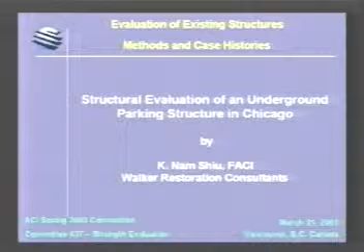Let me outline what I'm going to talk about. First, I'm going to describe what the structure is and give you some specific background on what we're talking about. Afterwards, I'm going to separate into two main portions.

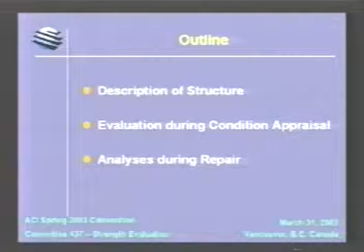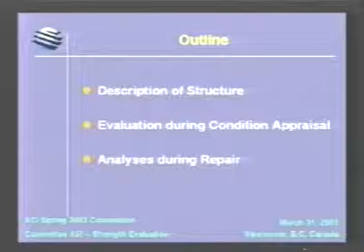One is the evaluation during condition appraisal before we actually recommend and do repair, including some structural analysis and the thinking behind it and what we did to evaluate and come to the conclusion on how we recommend repair. The other portion is during the repair, there are other issues we have to resolve, and what type of analysis we did to resolve the issues during the repair portion.

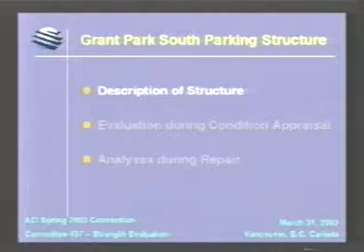The garage I'm going to talk about is Grant Park South parking structure, located right in the downtown area of Chicago. And this is a map.

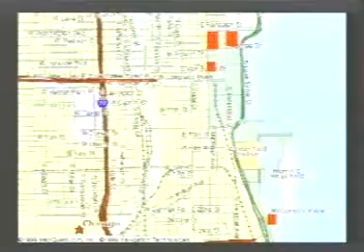And what you will see, if I can, this is an actual typical downtown area. The parking structure we're talking about is right over here. You can see all this green area is the park district. This is underground, so you won't see it from the top. It's all underground. These major parking structures serve a lot of the downtown commercial areas, so it's a fairly busy area for parking.

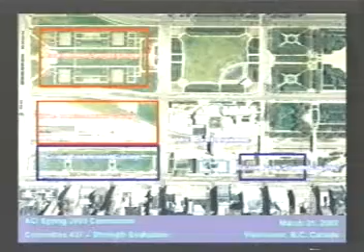And this is the overhead view. What we are talking about is this portion. As you can see, there's quite a bit of greenery, and Chicago's mayor is a green mayor, so to speak, so they want to keep it fairly environmentally friendly.

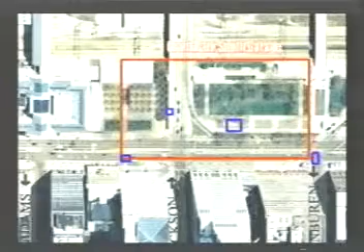It consists of two support levels. As you can see from the aerial view, the entrance comes from the street level and then goes into the first support level, second support level, and then there's an on-grade support. The total repair cost is about $30 million.

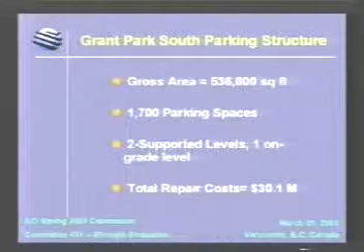Now, this was built way back then. We dug into the archives to find a lot of the basic actual construction documents to find out when they built it, because this is recessed and very close to the lake, as you can remember from the previous slides. There was major concern about hydrostatic pressure pushing on this structure, so actually the floor slab on grade resists a uniform distributed hydrostatic load, which makes for a very different design than what we would normally have for a slab on grade system.

Let's go into what we did during the evaluations. As many people talk about, the processes are similar: initial investigations and then detailed ones.

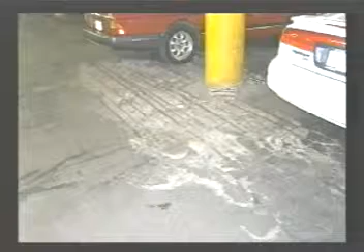When you walk into this garage before it was repaired, something that really catches your eye is you can see areas around the column like this where the rebars are exposed. You can see it humped up because it was pushing out due to corrosion, and this is not an isolated area.

You can look around the drive aisles, and some of the patches are already gone. You can actually see exposed bars. This is a reinforced concrete structure, not a post-tensioned one. You can also see some of the yellow lines, which we marked by sounding to find out where the delaminations are.

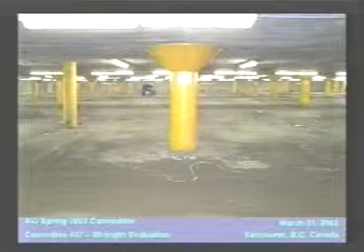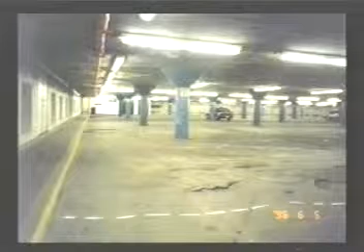We did fairly detailed mapping of the situation. As you can see, there's a lot of spalling and delamination around the column heads. Again, similar pictures show what it looks like, fairly deteriorated.

We also did material testing to find out the condition and level of chloride. This is inside, and we found out that the chloride level is fairly high.

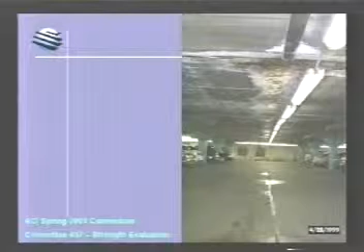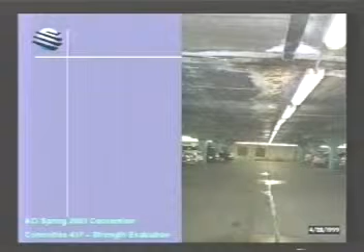Now, we also looked at the underside of the slab. In particular, you can see two things in this slide: water dripping down, and a wet spot on the lower level. When you look straight up, there's quite a bit of corrosion. That indicates that salt has been coming through the construction joint, causing the lower level of steel to corrode.

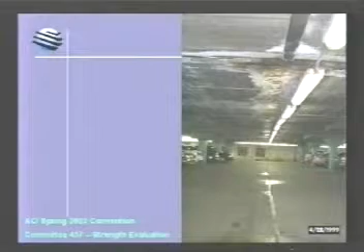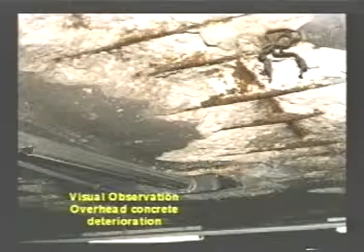And this is a close-up. It's a fairly bad situation, and you can clearly see the corrosion on the lower level has started, spalling the concrete.

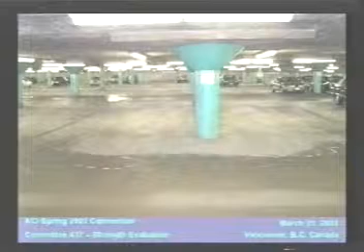Some areas look like fairly good patches, but in fact, the delamination is already there. So what we did, in order to get an overall picture, is we overlaid what we found onto a schematic drawing like this. And what we found out is all the negative moment areas delaminated.

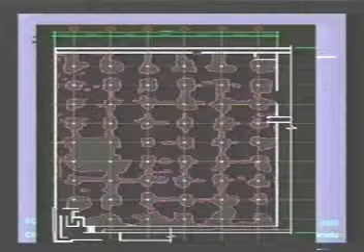That caused some concern. If this is a two-way slab frame, and with all the negative moment area delaminated, we're going to have a problem. But we didn't see any problem. So the thing is, we go back and take a look at what's happening.

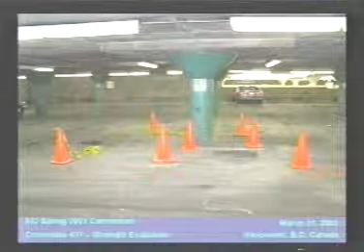So as the common procedure, we go out, make an opening to find out what is in there. And then based on that, see if we can get a better idea. Are we facing a dangerous situation? Do we close the garage? Or is it okay? This is the first thing we have to resolve in our minds.

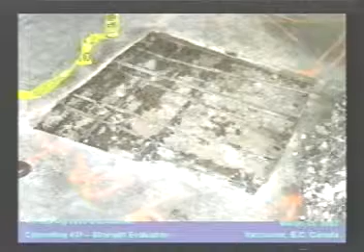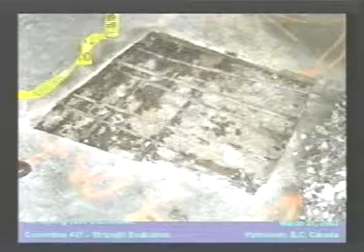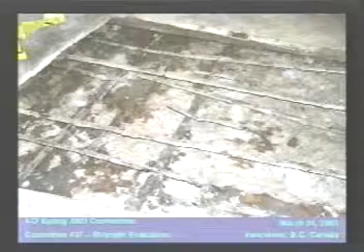So we make some openings, and this is a close-up. When we open up and remove some of the loose concrete and so forth, you can see there's not much steel left on the first layer. Now, if you count on that steel on the first layer to do the job for the negative moments, they are not doing it. So this is a concern, definitely.

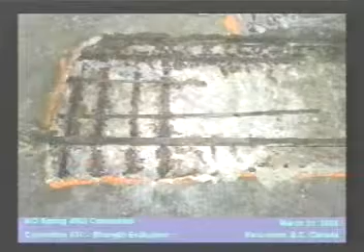And we also look at other areas that may be typical. This is another one. There's only one bar left on the top layer. The other one, the lower level bars immediately below, are fairly well bonded, but also starting to corrode.

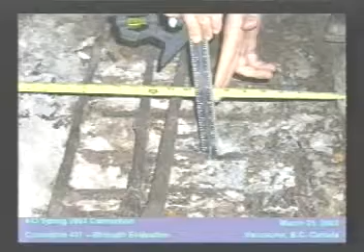So we measure the depth and document it as any conditions appraiser would do. And based on those calculations, we have to try to do an evaluation of what happened.

This is another area on a good patch area. What we saw is what the previous people did, the patching. We didn't do the patching. The previous people, when they did the patching, they replaced some of the top rebars, but they never touched the lower level rebars. You can actually see the upper corner where corrosion starts around that area.

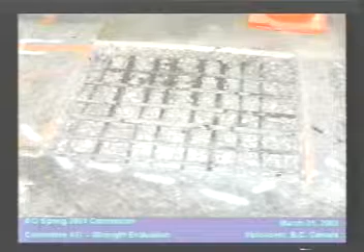That's why the corrosion for the lower level rebar is worse than the one on top, because this is the patch area. They didn't touch the lower level, but this is still on the top of the slab.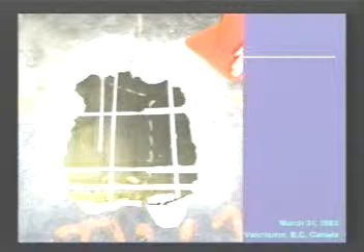Based on that, when your negative moment area is in trouble, you want to make sure what situation the positive moment area is in. This is what we did. We open up and look at the positive moment area in the middle of the slab to see what it is. First thing we observed, we didn't see any major shifting or deflections.

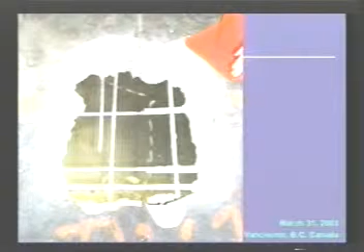We also see the bars are in pretty good shape. No extensive deterioration other than the one that is on the joints. Based on those, we did some evaluations.

This is a two-way slab system. In one direction, 100% of the slab reinforcing bars are no longer effective. The negative moment bars are gone.

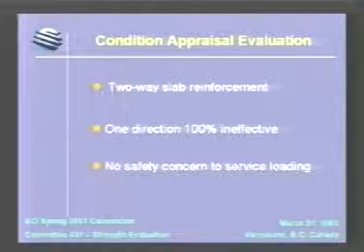We tried many different combinations. No matter what we do, if we take out the negative moment capacity, the slab is not going to make it. Now, the reality is the slab is not experiencing any distress. The only reason we can give is that the other one-way direction is taking up the slack. They're doing all the work. So it becomes essentially a one-way slab system.

This also points to the fact the previous guy must have known what they were doing, because when they did the repair, they never touched the lower layer. They only replaced the top layer of the steel. Even though the lower layer is corroding, they had to leave it in place, patch it, and change the top steel while leaving the lower level intact. In this way, they kept the one-way action always working and functioning.

Basing on this analysis, we're saying there's no safety issue concern at that time. The garage is working fine. There's no need to do anything particular.

However, if we want to repair the garage, this is the situation we're dealing with. If we want to repair all the negative moment areas, the lower level bars in the other direction start corroding too. It's going to incur major costs for shoring and other work before you can even touch it, because if you take the other bars out, the garage is not going to stand up.

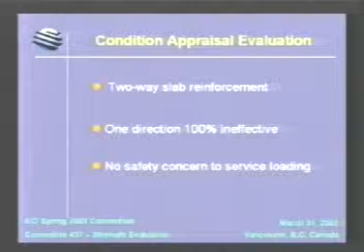So on top of it, there's a lot of chloride in the slab. What we recommend is we take the entire slab out and build a brand new slab structure.

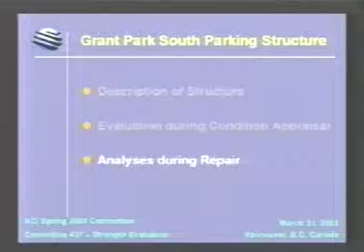So that goes to the final recommendation. Based on all those backgrounds and analysis, we recommend to the owner that it will be cheaper for them to replace the entire slab instead of coming back and patching. They are already beyond that point. It is no longer cost effective to do just patchwork.

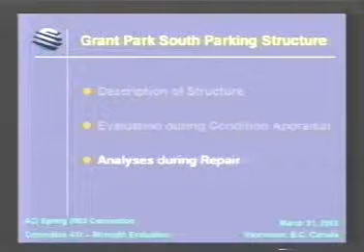So we did those life cycle analyses for them. And in doing the repair, we also encountered several areas that we have to clearly look into. First, I'll outline this as 4 points.

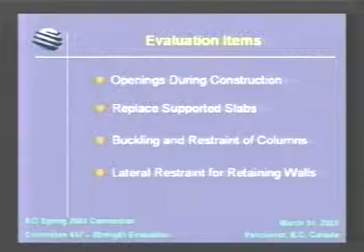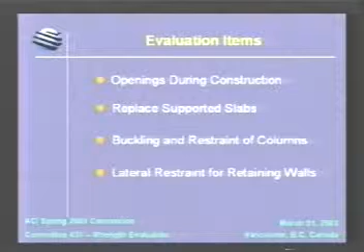When we do repair, they change the layout. The first requirement they ask us to do is maintain the garage to be open, meaning you can only do a certain portion of the repair, completely replace the slab, and keep the garage operating on the other half. That means you have to cut openings. So we have to be careful when we analyze it, where we should make the terminations and how that affects the entire structural integrity of the slab.

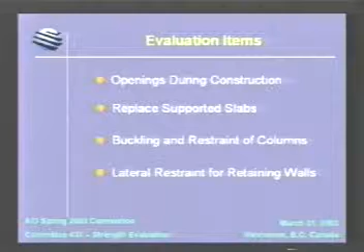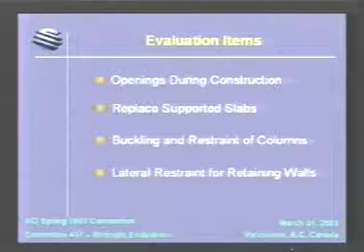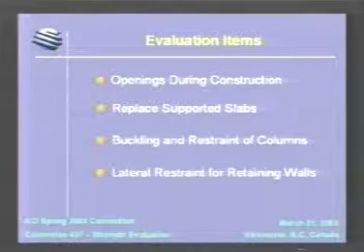When we replace the slab and take out the entire level, the column all of a sudden becomes not a single level column, it becomes a long column. We also have to check for buckling. This is an underground garage, and when you take out the slab, is the diaphragm holding the side retaining wall together? We have to go check for lateral restraint. So there are a lot of issues involved when we take the slab out and put it back in. There are other issues too, like shrinkage and shortening, the time-dependent behavior. When you put a new slab in, it's going to shrink. The columns and all the spacings are in place. How are we going to take care of it?

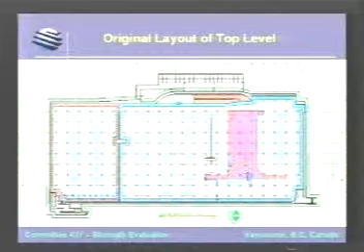Let me go into this, this is the original layout. The painted area is where the ramps start coming out and go into all those areas. This is before the repair. The new design wants the layout to be a totally different entrance. They want to close this off, and that's the area we have to look into.

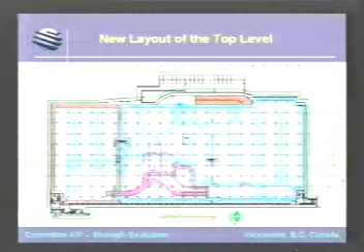Later on they changed their mind, saying it's too complicated to phase it and maintain the garage open. So we decided to close down the entire garage, making life a lot easier. But prior to that, we had to do all the phasing diagrams and figure out how far they can go and how many parking spaces they would need.

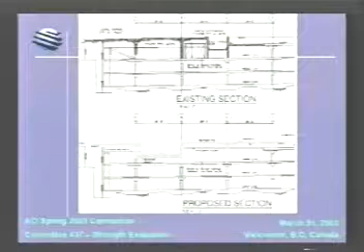This is a cross-section showing before and after, the existing and the proposed condition. You can see we changed the roadway, and this is the new ramp coming down. We take out the existing slab and put the new one in. I'll show you that in the coming slides.

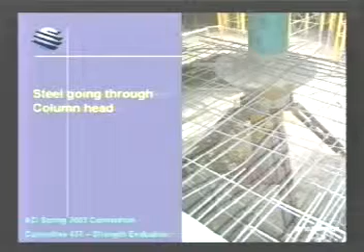This is another look during the demolition, clearing out the concrete. We have to tell the contractor to take big pains not to cut off those bars going through the columns.

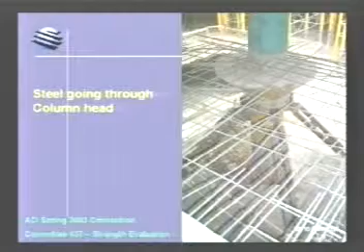As I said before, in order to maintain the integrity and anticipate the time-dependent behavior of the new slab, we put in quite a bit of steel to control the volume change. As you can see, everything is already set. Concrete has to go through volume change with time, so we put in quite a bit of reinforcement, calculated just to take that.

Now, you notice we do not use green bars. We used regular black bars, but with good cover, and we also used a corrosion inhibitor, a couple of layers, to fight corrosion. One area we don't want to use epoxy bars is because epoxy bars increase the development length. You can see the amount of steel we're putting in there, if you put in epoxy bars, the percentage of steel will increase, making it more congested.

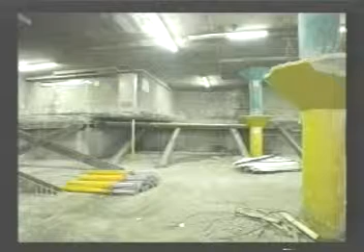I'll show you what we did on the support. This is the diagonal struts going in. Because this is below ground, we have to have these struts to take out the lateral load coming from the soil pressure. We are very concerned about that, and all the way around the entire perimeter, we have to put this in place before any of the slab can be removed.

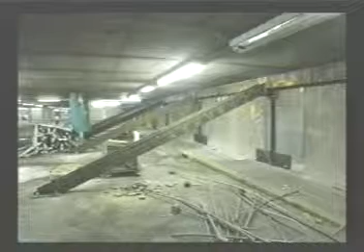If you look at this particular one, there's something of interest. This diagonal strut comes in and anchors at the top, but behind it is an air panel, because behind the wall is the plenum for air circulation. So there's actually a gap behind the wall before you reach the retaining wall. That's why we have those anchors spread out on top, then go through behind the plenum into the retaining wall.

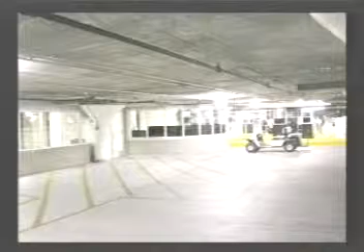Finally, we completed that, and this is the new garage as it is right now. It's totally complete, and as you can see, it looks totally different. And those are the brand new slabs with the existing columns.

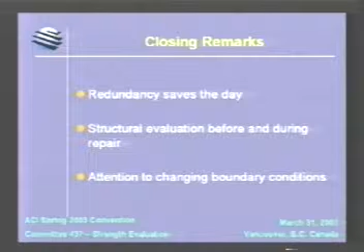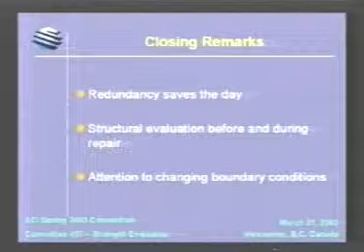So let me close in a very simple fashion. It's mainly three things. First, redundancy saves the day, and this is always the case with structural elements. Sometimes we count on the structure behaving the way we designed it, but fortunately the buildings never listen to how we want them to behave. They behave the way they want to. In fact, we should learn from them. The redundancy essentially kept the Grant Park Garage up and running for a long time.

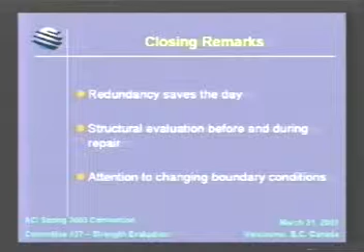The other thing is structural evaluation before and during repair is very critical. If we find out exactly what the situation is, that dictates what type of repair we should give to the structure. That makes a big difference. If we don't know all the intricacies, and the previous guys patching it start digging below and remove all the corroded rebars, they're going to see major structural distress.

And finally, we have to be careful during the repair to address how we change the boundary conditions of the new elements and design for those. So that's the end of my presentation.

Any questions? Yeah, I have a question. I noticed that you placed those diagonal struts on the existing slab.

I'm wondering about the vertical component of the force from that strut now sitting on a slab you're aware has diminished capacity. Were you able to really quantify the existing strength of the system as it was behaving as a one-way slab, to place those loads on it without concern? We actually checked that. We used that capacity to take the load. In fact, you see it coming in at an angle, going down. That's why we had to take it all the way back to the existing slab.

Did you do any work to the parquet roof slab? And my second question is, did you apply a membrane on the new slabs? What's the first question again? Did you do anything to the parquet roof slab? Top slab, the top slab. Yeah, we took the slab out actually because it's part of the roadway.

So we had to put it back, but the design has to follow a different design criteria because it belongs to CDOT. The second question was about placing a membrane on the parquet slab. Yes, there's a different membrane put in. The roadway coming down was not concrete, we used asphalt, so there was a membrane on top of the roadway, but it's integrated with the asphalt roadway.